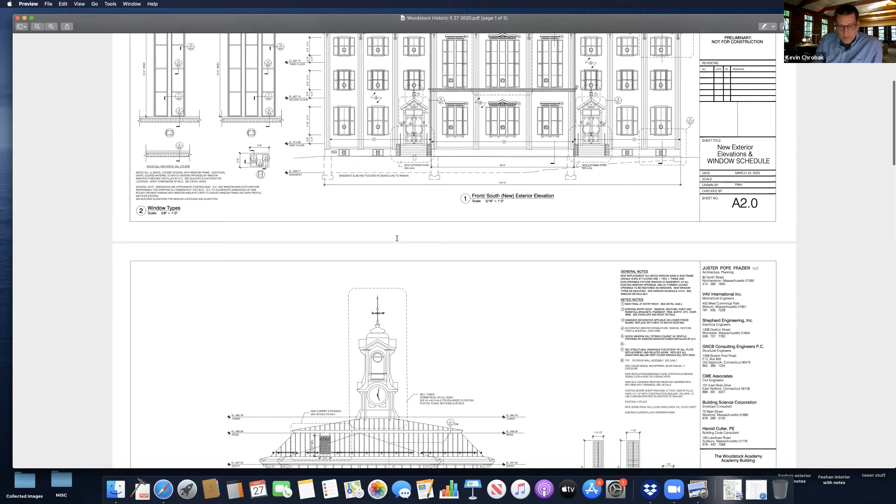The clock tower restoration is still being discussed for refurbish or restoration this summer. We're presently in part 2 of the SHPO submittal, the State Historic Preservation Office submittal. Once we get our part 2 approvals, it basically says we approve the project as designed and it's eligible for the following tax credits.

Once we get that, we can release the bid documents for the tower restoration this summer. That would be phase 1, the clock tower restoration, and phase 2 could begin potentially as soon as next spring, of course it's all trustee decisions. We presently have a SHPO direct grant for the restoration of the clock tower for $100,000, and we hope to hear from SHPO in the next week or so on a planning and development grant of $20,000.

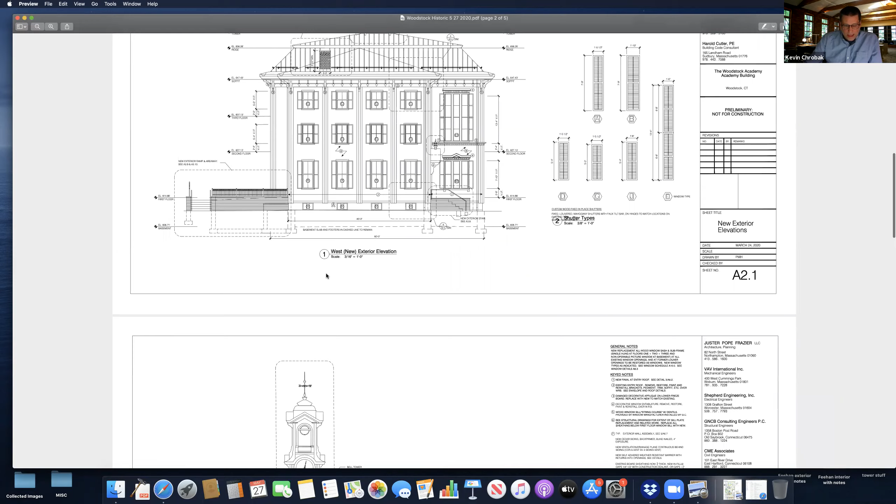The opposite elevation, which is the east, faces basically towards the field house and library, is essentially identical to that of the west, but we don't have any kind of chimney flue there because none of our boilers are on this side of the building. So it's going to match very closely to what was there originally, with the exception of the snow rails and the barrier-free construction on the north side. I'll say the north side is probably the least prominent of the elevations on this building.

So again, it's pretty much as we described originally. The north side, this is where you get to see what we're proposing for the barrier-free access into the building. So it'd be a brick veneer matching the existing brick of the foundation.

And then because we're going up about 3 feet, we do need a guardrail and a place to hide the sort of sloping railing. So what we're doing is creating this stepping aluminum fence, which will be a black picket fence that'll step up to the center.

The center will be we're proposing a seal of the academy, which is of the spire itself. That'll be either cast aluminum or cast bronze seal. There's also plans to have a dedication plaque at a small knee wall here, which will explain the history of the building and connection back to the founding of the academy and the founding benefactors, as well as anybody that may step up.

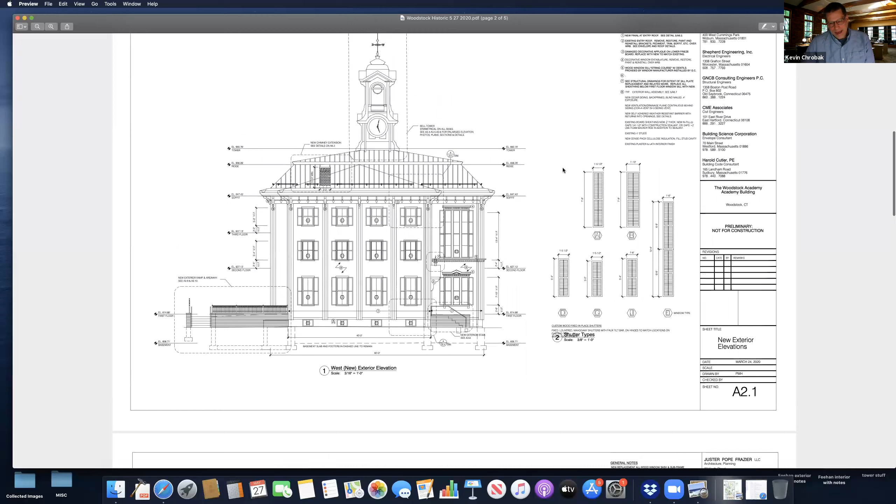In terms of paints and colors, we're basically matching what's there presently. The only documentation we don't have anything on is the shutters themselves. Apparently, when they did the renovation in '93, they found a bunch of shutters in the attic and promptly threw them all out. So I think just going back to the cottage as a reference there, given that they share a donor, is an appropriate gesture.

The hope is that with your concurrence, we will get SHPO approval and substantial tax credits to help finance the renovation. If so, we would be looking potentially to bid this in spring of next year, at which point the entire set of drawings would be in front of the building inspector and all the appropriate town departments, including the historic commission, so you'd have one final look at what we're proposing here.

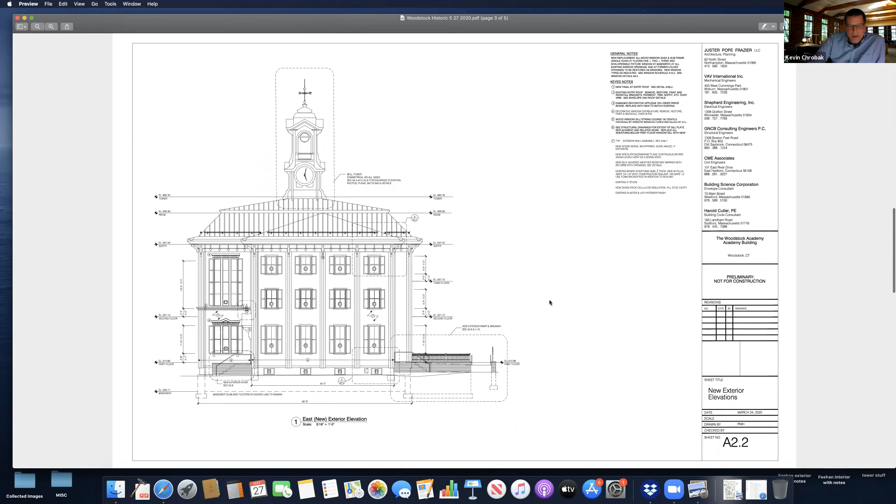As I said up front, the one change that's come about based on regulatory review with the fire department and building inspector is the fire department connection moving, and then the beacon here. And then on the north side, we're also doing a beacon at the fire marshal's request at that location as well. So that's pretty much what we've got in a nutshell.

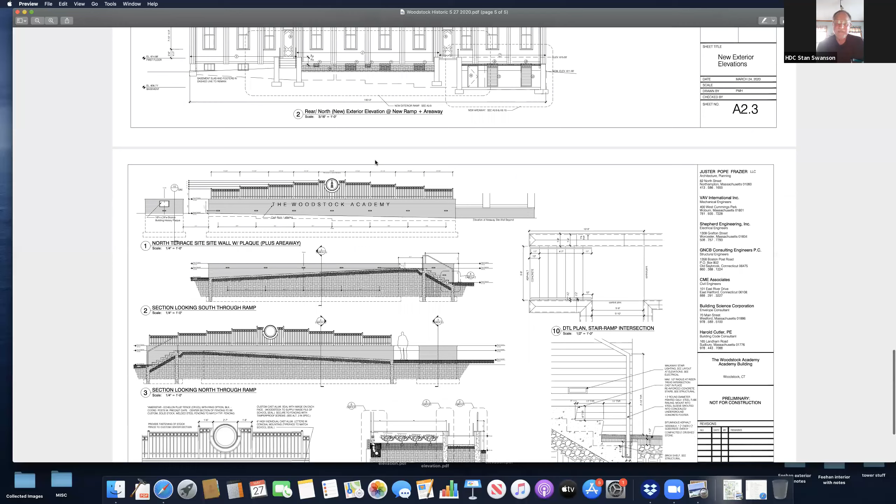Can you hear me? Yeah, I can. It's just sort of a curiosity that the Woodstock seal is off center from that window. Yeah, we did look at that. Not everybody, when we travel through life, tends to view everything exactly perpendicular, so there's probably 1 in 20 people who may actually notice that offset. The issue is basically we had to do the 1 in 20 run, and we also had to respect the access from the parking lot. This entry is basically on axis with the existing parking lot and the sidewalk back to the parking lot, so we were trying to maintain that axial view of the entry all the way from the parking lot. If we were to shift the seal and this construction a foot over to the left or so, it would have inhibited that clear line of circulation. Well, I was aware, yeah, I knew what the limitations were. It just caught my eye, that's all.

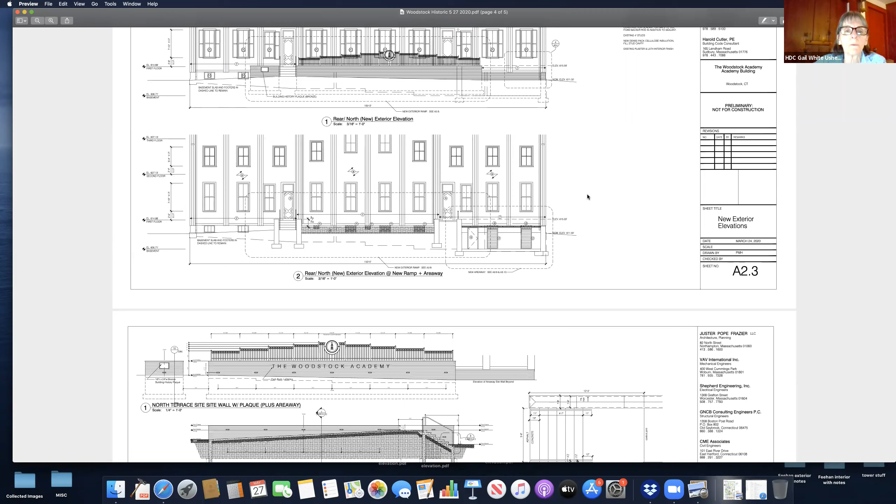You mentioned the snow rails going on the metal roof. Are those just going to be simple rails up there? Yeah, they'll be what's called a pipe rail, about a 1-inch diameter pipe, spaced roughly 4 inches apart, roughly 8 inches high. There's a vertical bracket every 4 feet, which works with our 16-inch batten module.

So this is a historic snow rail. You can get little tabs and things of that nature that won't function as well, but this will do the job, and it'll look period to what would be on this building. So no decorative features on it. No. Good. Then the next question had to do with the metal roof itself.

Color: it's scheduled to be zinc coated copper, which when it first goes on looks very much like lead coated copper, a sort of burnished gray color. They really don't make lead coated copper anymore because of health issues, so zinc coated copper is the closest thing. It's also referred to as terne roofing, which is zinc and steel.

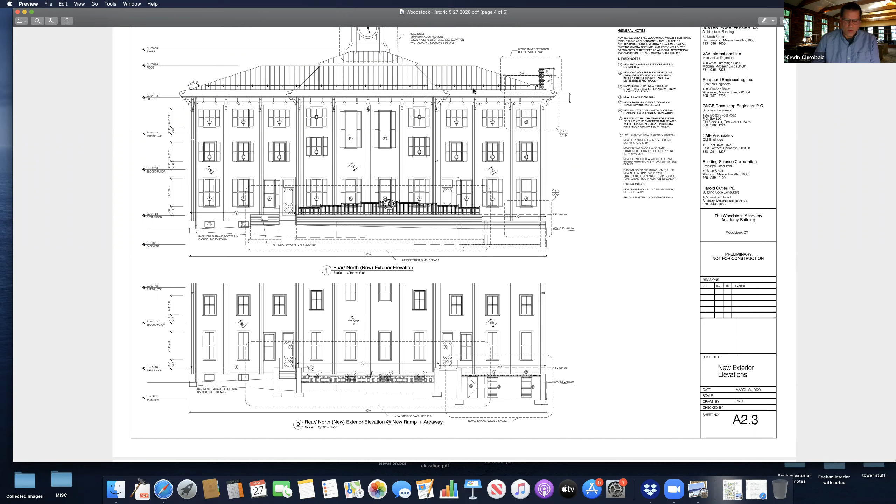We do suspect, based on the photographs, that this was a metal roof when it was originally built. And certainly the batten system would be entirely appropriate to the Italianate style the architect was working with here.

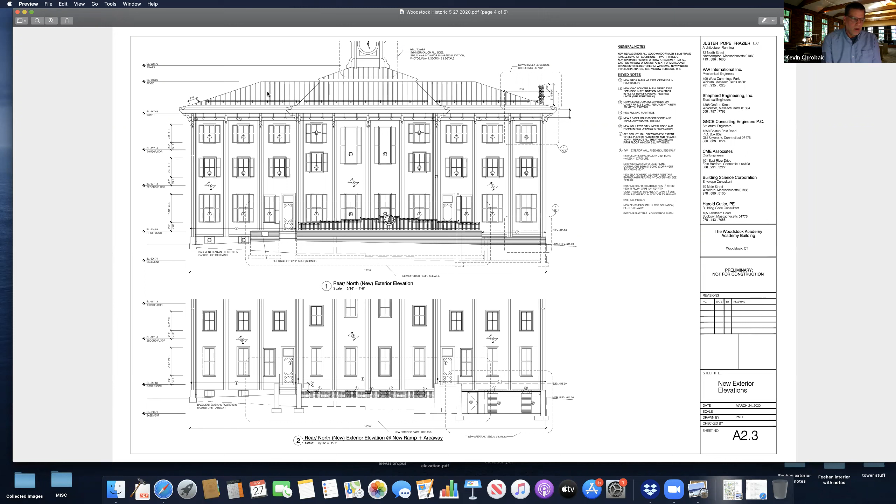This is Earl. Will the color change over time? Zinc coated does not change, it doesn't really oxidize per se. It might get a little bit more burnished or dull, but it essentially will stay pretty close to its original appearance. It's fairly stable.

Tim, do you have any questions? No, I don't. Okay. All right. So Kevin, what do you need approval for at this meeting?

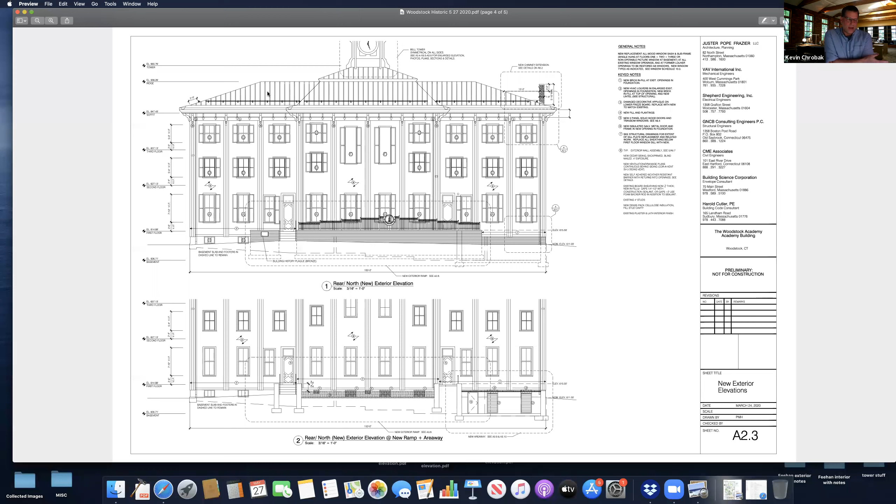In order to support the Part 2 application from the SHPO, I need a certificate of appropriateness for the entire project. The Part 2 is the entire project. We got the certificate of appropriateness for the tower because the grant required that as part of the grant application, but the application tonight is for everything else.

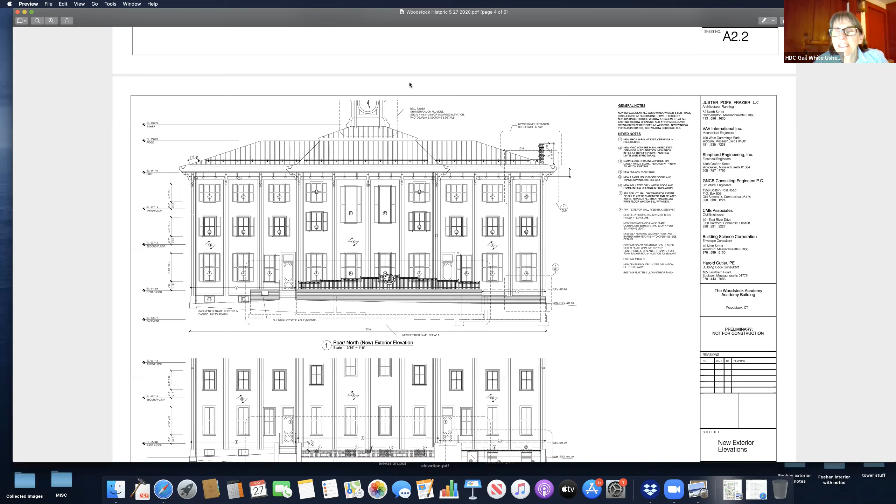Okay, so discussion, commission members. Excuse me. Stan has a question. Yes, Stan. Windows are proposed to be clad, I assume?

The windows are wood windows, painted wood windows. We're speccing mahogany, painted mahogany wood windows, so they'll be consistent with the original windows. Oh, okay, that's good.

Nice room you're in, Kevin. That's our office. All right.

So, commission members, any discussion about the project as presented? This is Tim. I think it's pretty much what he presented before, and I think we're all very happy with those plans at that time. I think it's an excellent plan to restore the building.

This is Gail. I also think that the barrier-free entranceway is really well done and very thoughtfully done. And it's also wonderful to see that the plans include going back to a lot of the original features of the building.